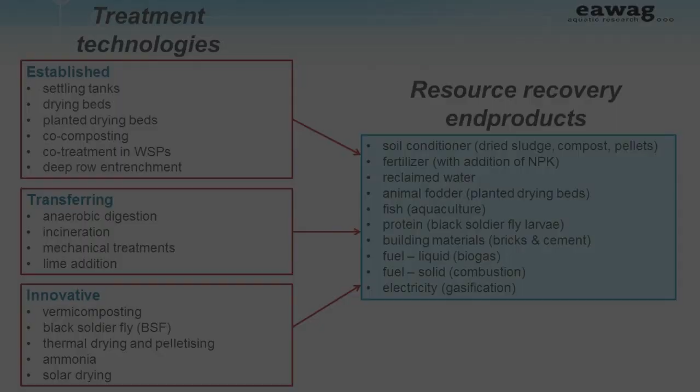In addition to the level of experience known from implementation, it is also important to consider the treatment objectives. Technologies can then be linked together in a treatment chain depending on what the final goal of treatment is. The main treatment goals will typically first be settling for solids-liquid separation, and then depending on the end goal, dewatering, drying, stabilization, and other forms of final treatment steps such as pelletizing.

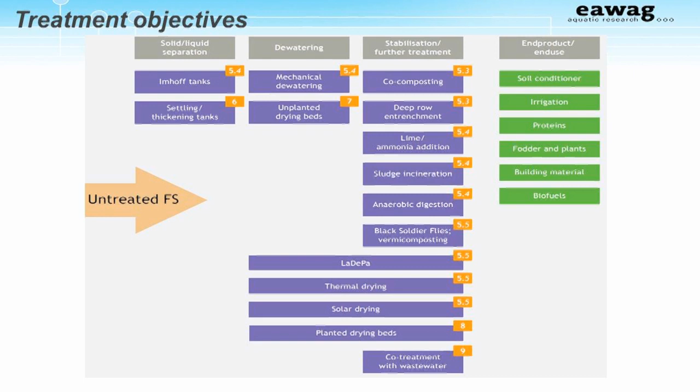So how do you select the right combinations of treatment technologies and the right treatment end products? Designing technologies for resource recovery options can define performance goals that need to be met, while increasing financial flows to offset treatment costs and provide an incentive for efficient operation of treatment plants, as operators are also providing then a product for customers. Some forms of resource recovery are shown here.

You don't want to over-design treatment plants because it wastes money and resources, but you can't under-design because it does not provide adequate protection of human and environmental health.

For example, if we are using dried fecal sludge as a combustion fuel in industry, we are more concerned about the level of dryness and not pathogens. However, if we are using it as a soil amendment to grow salad greens, then pathogen reduction is of utmost importance. This is the same approach engineers use to design wastewater treatment plants. You research the treatment requirement for the effluent and solids, and then you design the treatment plant to meet those requirements.

This is the general definition of engineering design: the formulation of a plan to allow an engineer to build a product or infrastructure with a specified performance goal. But it seems like when designing fecal sludge treatment plants, people have forgotten about basic engineering design and do not have a way to logically select the final end goal to design the treatment plant for. Part of the reason is a combination of over-stringent requirements which cannot be met or are not enforced, and another is a lack of fecal sludge treatment requirements.

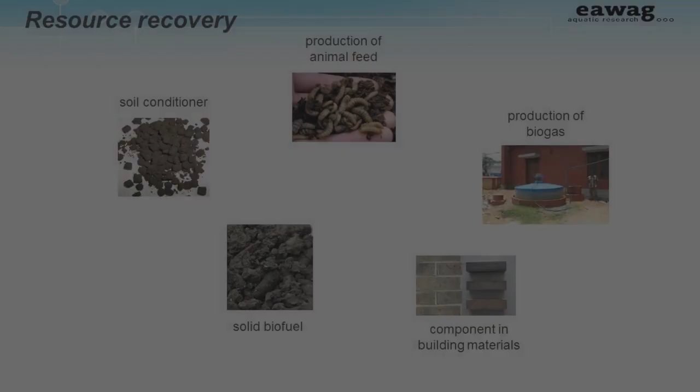Once you select performance goals, then you can design your treatment options to meet them, working backwards, considering all design variables to arrive at the solution. Design variables can be quite wide-ranging and complex, including factors such as local skills and capacities, legal requirements, regulations, norms, social acceptance, financial viability, existing fecal sludge infrastructure and services, and characteristics and quantities. You will hear more about these variables in later chapters of the book.

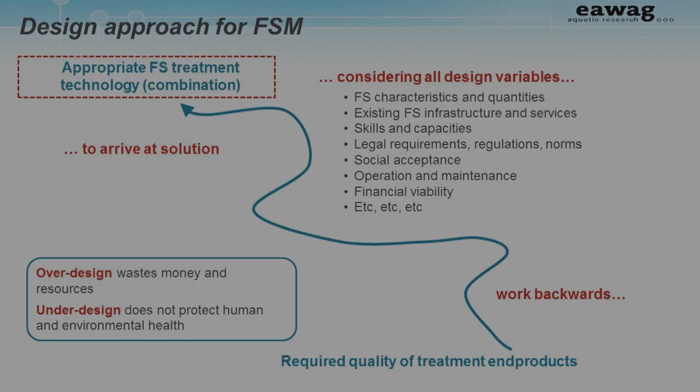So hopefully that all sounds logical, but how do you select the right treatment end product to design for? Especially if you're working in an area that does not have specific regulations for end use. At Sandec, we have been working on a tool together with economists and experts in business development to aid in selecting optimal treatment end products.

Since the desired goal is the end use, it is important to make sure that a demand exists for that treatment product. In addition, it should be a significant and consistent demand. To determine this, we need to know the market attractiveness, which is comprised of the market size and the market growth potential. Social acceptance can be closely linked to commercial value and thus market demand.

The market driven approach provides a way to identify fecal sludge treatment end products that have the largest market potential for volume and growth, and has now been field tested in Kampala, Uganda, Bignona, Senegal, and Son La, Bac Ninh, and Ba Ria, Vietnam. Through this research, we have shown that there is a higher market value for fecal sludge end products than the conventional use as a soil conditioner.

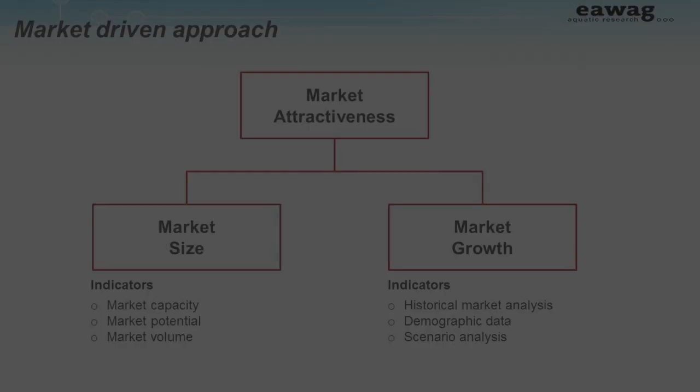A draft version of the method can be downloaded from our website. So the goal is to select an end product with a significant market, to ensure a reliable demand, and to maximize revenue. This is done by identifying currently used products in the city to see what could be replaced or supplemented with fecal sludge treatment.

For example, fertilizer could be replaced by nutrient-supplemented fecal sludge pellets. Protein in fish feed could be replaced by black soldier fly larvae used in the treatment of fecal sludge. Forage plants for animals could be supplemented with plants from planted drying beds.

That is just a brief overview, but you get the point: that it is using knowledge of economics, not engineering, to select end products with the greatest market potential. This information cannot be used in isolation. It then has to be factored in with other engineering knowledge and previously mentioned design variables to select the correct treatment technology options. For more information, please also refer to the planning section of the Fecal Sludge Management book.

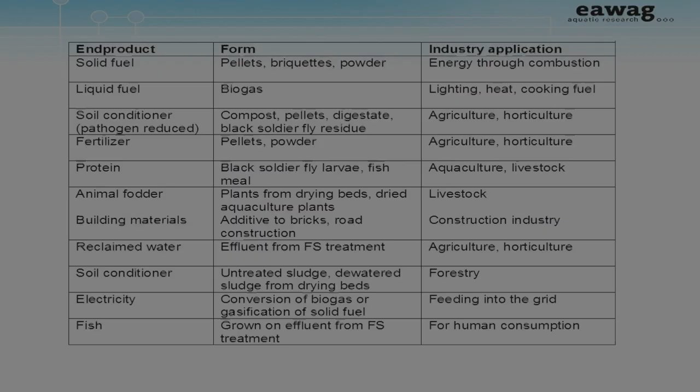So once you have decided on your end products and your treatment technologies to produce them, then you have to know how much fecal sludge will be coming into the treatment plant and what the fecal sludge characteristics will be, so that you can build it to be the right size.

But the problem is there is a major gap in knowing how to reasonably estimate fecal sludge characteristics and quantities on a citywide scale, or at appropriate scale for the intended area that will be served by the treatment plant. Typically, records do not exist of how many on-site systems are constructed in a city, what types of technologies there are, what quality the construction is, how often they are emptied, or if they are emptied at all.

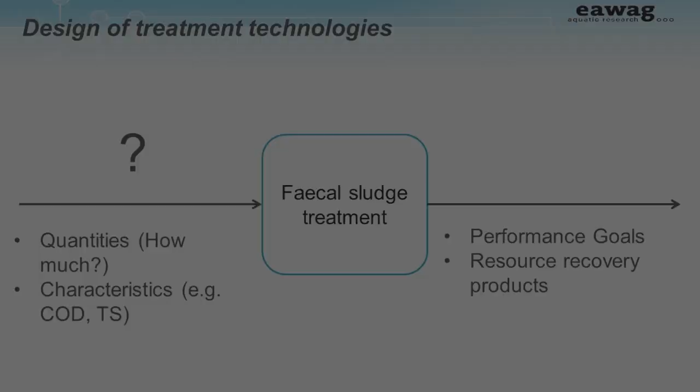At Sandec, we are also working on developing methods to fill this gap. For quantification, there are three basic hypotheses.

First is estimating the total amount of fecal sludge that is currently being collected and transported. This is dependent on market and infrastructure and is simply a snapshot of the current situation. If a treatment plant opened today, or if there is an existing plant, this is what would be delivered.

Second is based on the assumption that once you open a treatment plant and there is a legal and affordable place for trucks to discharge, it will greatly increase the amount of fecal sludge being collected. Meaning, if you base your estimate on the first hypothesis, the treatment plant will already be at or over capacity when it opens. Treatment plants, hence, need to be designed to meet a capacity larger than just the current situation. But the difficulty lies in knowing what the correct capacity is.

Third is estimating the total fecal sludge produced in a city, or the area the treatment plant is designed for, based on estimates and assumptions for populations, amount of excreta produced per capita, and degradation rates that occur in on-site containment prior to collection and transport to treatment plants. This value is how much fecal sludge would be delivered to a treatment plant if, in an ideal world, all of the fecal sludge in the area was safely collected and transported to treatment plants.

So that is quantification, but characterization is also problematic due to the high variability of fecal sludge. When estimating characteristics for wastewater treatment that is continually collected and homogenized in a sewer system, it is relatively straightforward to make a sampling plan. This is greatly complicated with fecal sludge, as every on-site system has different characteristics at the household level.

A sampling plan that captured the full range of characteristics on a citywide scale, or scale appropriate to a treatment plant, would be prohibitively expensive and time-consuming.

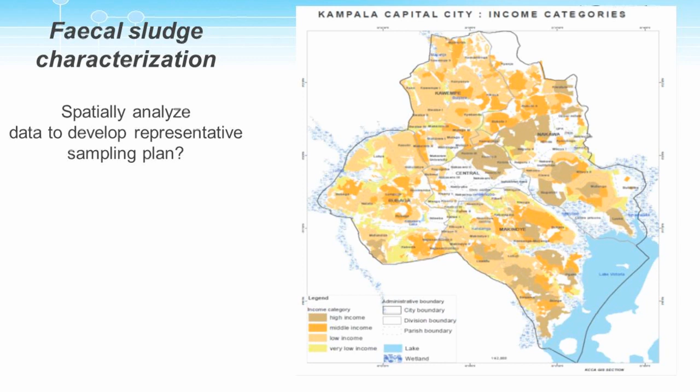To address this, we are also developing a method for characterization on the scale required to design treatment plants, based on the hypothesis that spatial demographic data can be used to design a sampling plan that will be representative but not too resource-intensive. For example, maybe income level is a predictor because on-site systems in higher income areas are potentially better constructed. We've now field tested this hypothesis with 80 samples in Hanoi and 180 in Kampala, and the results will continue to be updated on our website.

So back to optimizing and selecting technologies. Another important design consideration is balancing available land with available financial resources. In general, technologies that require more land area are less expensive and less technology intensive. However, available space in urban areas is very limited and expensive, so there is a great need for reducing the required footprint of existing, transferring, and innovative technologies.

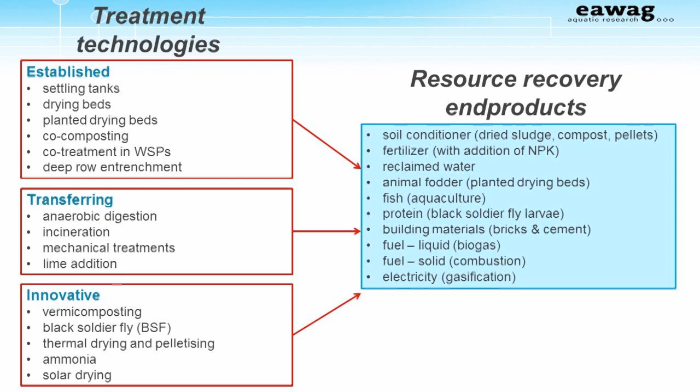To address this, Sandec is conducting research on how to reduce the required space for dewatering and drying. This can reduce the required land area for treatment or increase treatment plant capacities. Some of our recent research, published since the fecal sludge management book came out, includes relatively simple modifications for established technologies like drying beds, such as greenhouses and mixing, which alone could reduce required treatment areas by 20%. Another possibility for transferring technologies from wastewater treatment is the use of coagulants and conditioners made from locally available waste products to increase dewatering.

For example, a waste product like shells from the shrimp industry could maybe be used to manufacture chitosan. Another example is pelletizing, which, as mentioned earlier, has been proven to be an effective way to significantly increase the drying of fecal sludge from 60 to 90% dryness for use as a fuel. More information on this research can be found on our website, and further examples are presented in Chapter 18, The Way Forward, of the Fecal Sludge Management book.